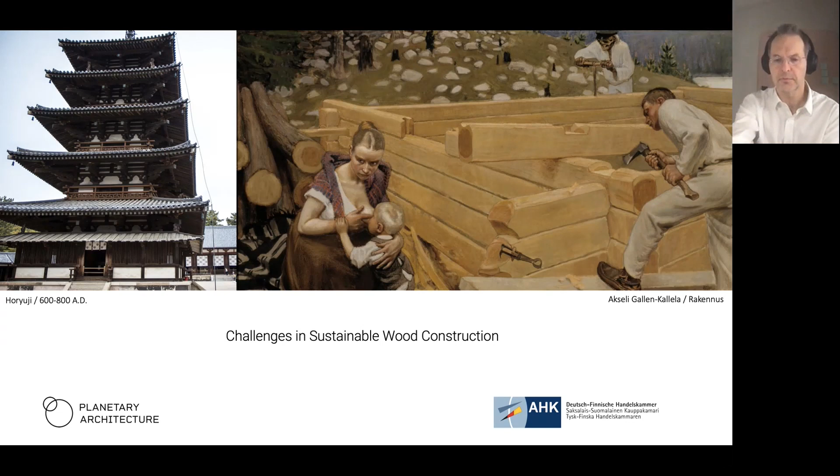And in a similar way, in the Finnish culture, we have had these log house structures that are like the ultimate circular economy way of construction, where a single piece of log can be taken apart and then moved into new places. And that's also a strong part of our cultural heritage.

But a brief introduction. I'm an architect. I used to run an office called Pekka Pakkanen for 12 years. And in that office, I was the chief designer of Allas Sea Pool in Helsinki. I was the local partner and the chief designer of Serlachius Museum in Mänttä, and the local partner of the winning entry for the Guggenheim Helsinki competition.

That was the biggest architectural competition at that time. It had more than 1,000 entries. And I'm teaching timber architecture in Aalto University as a part-time teacher.

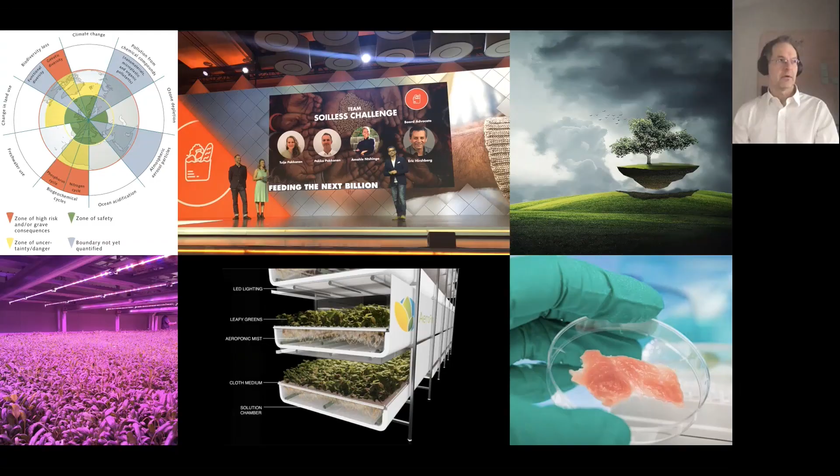The reason I started my present office called Planetary Architecture was that I hit a wall of meaninglessness maybe some 5 years ago. Our office was doing sort of high-class architecture, but it didn't feel like the things we were doing were answering the biggest questions that our generation should be tackling.

And I thought there was a real issue. We can affect quite a lot. The effect of architects and the construction field is huge, and I think we should use that to the benefit of both the planet and ourselves and the future of humankind. And in this path of thought, I just had to leave the previous office because the route was fixed, and I had to find something new.

As a starting point for this new path, we took part in an innovation competition in Silicon Valley. The organizer is called XPRIZE Foundation, and they had this huge science competition called Feeding the Next Billion. How do we develop the food systems to provide food for the next billion people that will be here in 12 years? Our task was not to really solve the issue, but define the question that the science community should answer.

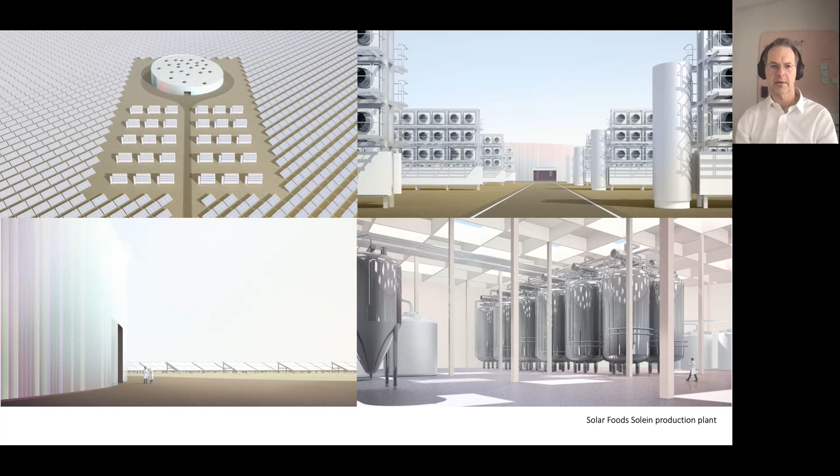We took part in this competition for like 8 months, and we gathered a big team of scientists both from Finland and from California. And to our surprise, we managed to win this. On this path, we learned quite a lot about future food production techniques. And the idea was how could we mix this knowledge with architecture, the knowledge that I had previously. From that starting point, I started the office called Planetary Architecture.

The point of why we call it planetary is that in every project we see the planet as one of the clients. Of course, the planet doesn't have a voice, so we had to imagine that. One of the first projects was for Solar Foods. That's a Finnish startup that is gathering CO2 from air, cooking it with bacteria, and producing protein powder that can be eaten. And we built a demo factory concept for them.

We tried to build this out of wood. And this was maybe the first learning from the challenges of wood, that in an industrial environment, it's actually quite impossible to have timber structures as the fire hazards are quite heavy. So we did a lot of study for how this could be built of wood, but in the end we figured out that it was impossible.

In the next case, the Neste oil company organized an open competition for ideas for the future gas stations. Once oil is not being used to run cars, what will they do with their network of gas stations? Our claim was that it should be a network of service stations, with several different services that would be prefabricated timber units placed on the plot.

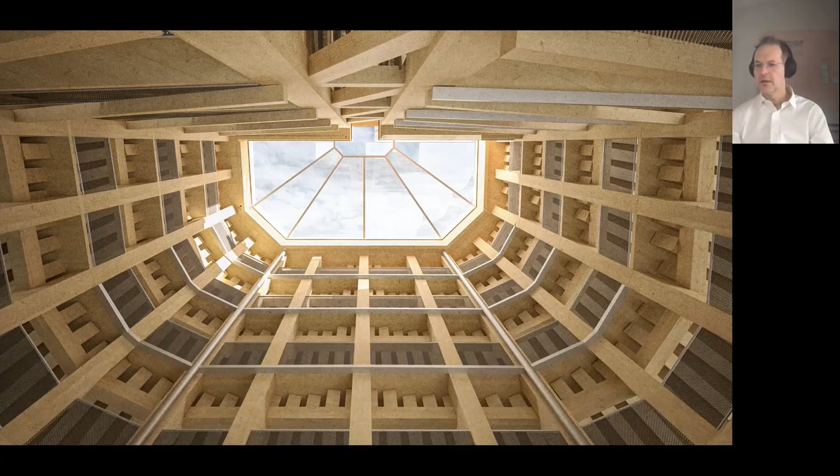Another issue or challenge with the use of wood is once you use it really heavily, like in the case of a parking garage, how would that be built out of wood? If you see a parking garage as an archetypal piece of construction, it is the most simple structure, where you cannot really take anything out, and it's also the one that has to be built the cheapest.

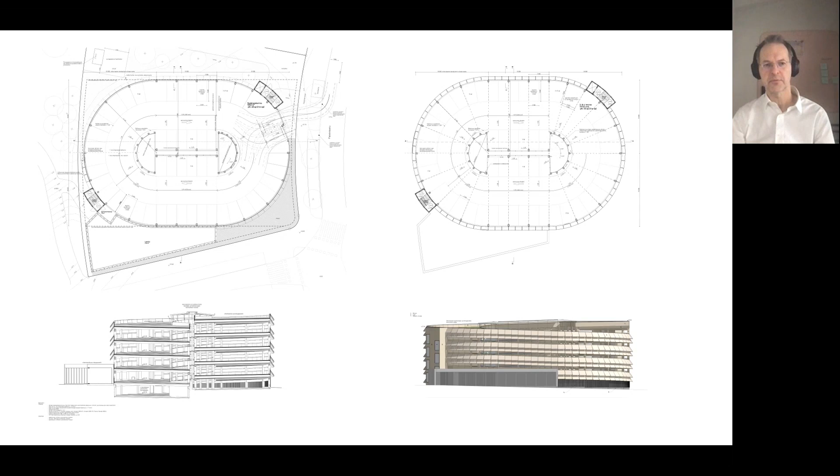So we made this parking house concept for the cities of Helsinki and Vantaa, keeping in mind that it should be as cheap as a concrete structure, and it should be something that can be taken apart, that you can add floors, that you can have it with prefabricated modular units with a limited amount of different modules. And in the end, we managed to build this system so that it takes all the weather load.

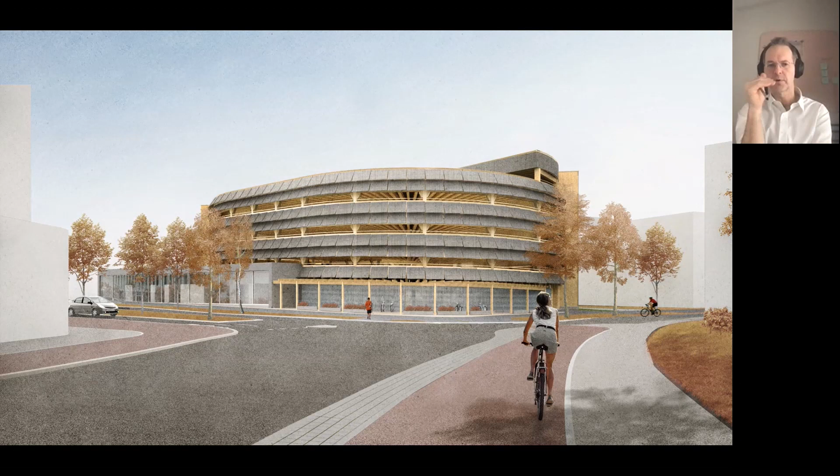The facades are built of Akoya that has a lifespan of 50 years, and on the inside, all the structures are completely solid wood, except this thin layer of moisture barrier on the floors that is not wood. And of these two samples for Helsinki and Vantaa, it looks like the Helsinki model will be built out of concrete, because they're used to doing that.

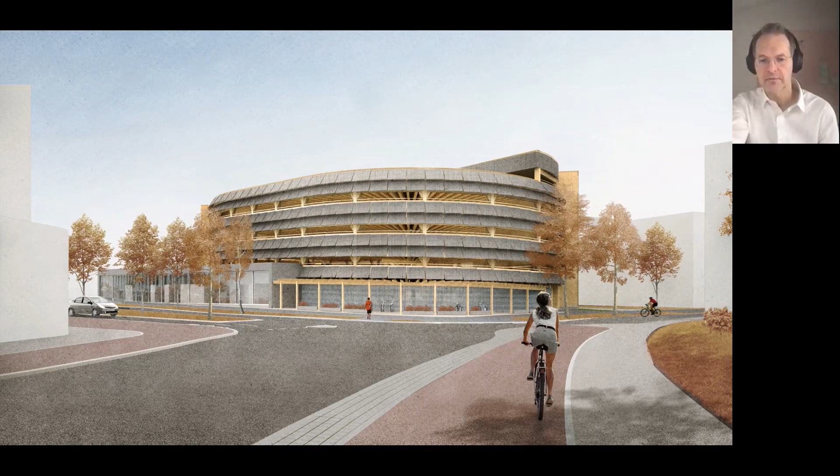This is one of the challenges of the use of wood, that as you try to bring something new to the market, there's a big challenge of changing the system, because construction is about risk management, and the risks are easily managed in the way that people do what they have been used to doing. But in Vantaa, it might be that they build this first pilot project for the timber parking house.

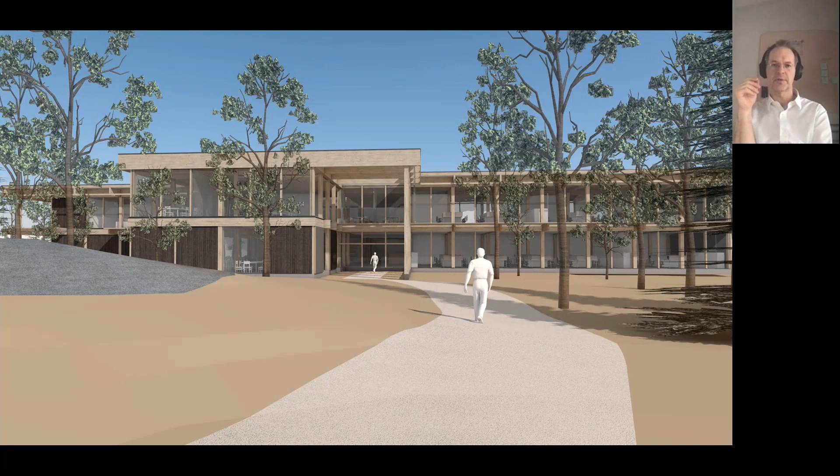And in this path of thought of the long lifespan, if you imagine this first image of the Japanese temple where pieces can be replaced, this is something that's really typical for timber, that it has mechanical joints. So if you build an office building, you can build it out of separate units that first of all have this 50-year lifespan, but once these elements are at the end of their lifespan, they can be replaced. And in this mechanical way of joining pieces, you can also expand the building.

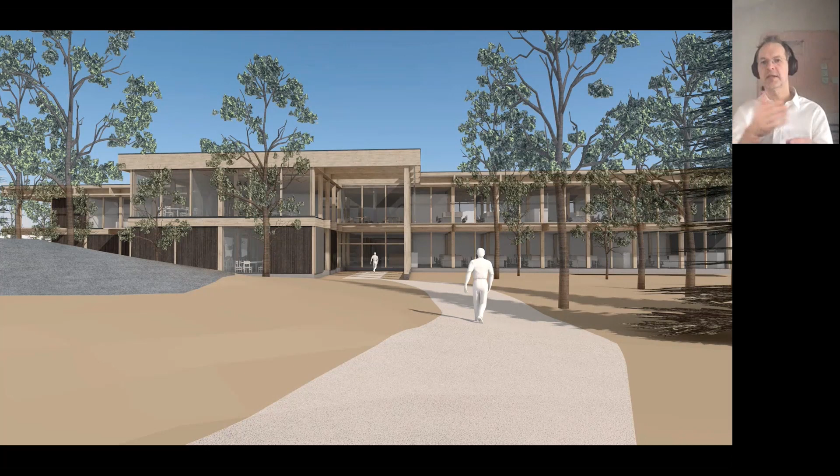So this is the headquarters of Versowood that we're designing in Vierumäki in southern Finland. It's a building that is designed to be 2,400 square meters once it's built, but then it can be extended in 3 directions using these similar modular pieces. And this is the inside of the building.

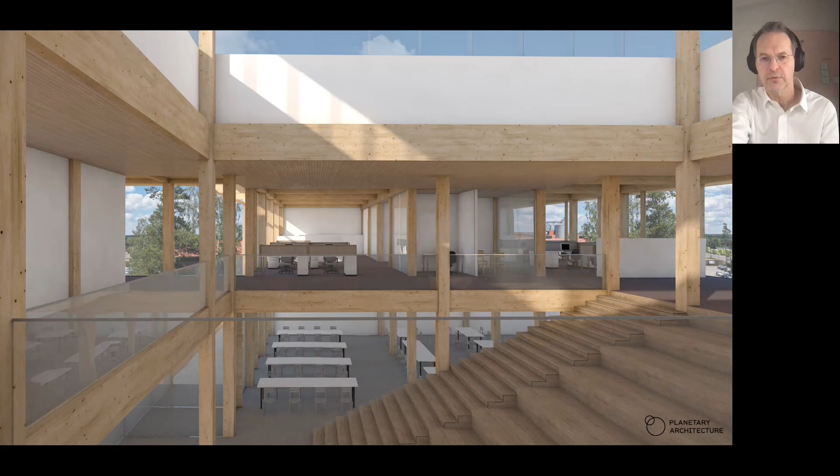It's in quite an early design stage, so now we just have the concept of building this forest of timber columns that continues the forest of the outside, and then around this there's a little dense park-like forest where this sits, and this is looking outside all the time to the forest and to the roots of the timber industry.

And speaking of lifespan, one way to extend the lifespan is, of course, to reuse the pieces. But another way, in addition to that, is that these pieces can be recycled in the first place. This is an experimental future street project we did for the city of Espoo last summer, and there were lots of thoughts of how the street could be used.

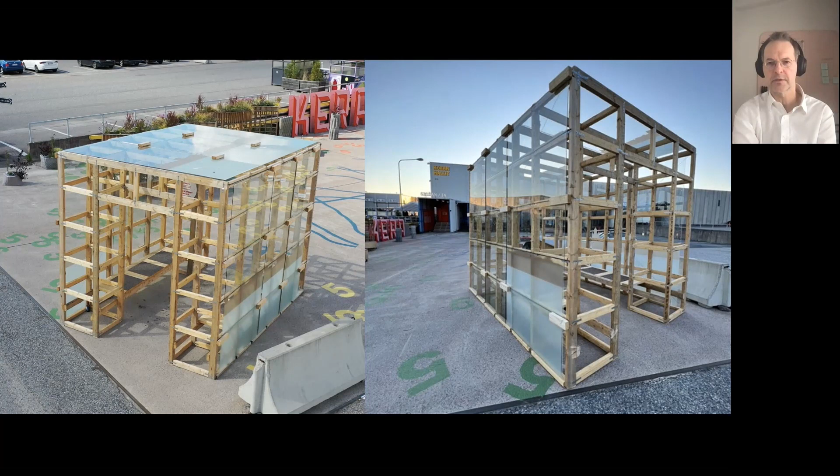But as we speak more of wood, this is this little street pavilion that we built for this exhibition or this demo street, and all these construction elements are recycled already. The vertical parts are from a bridge construction site, the horizontal ones are from the packaging industry, and the glazing is from office buildings.

These are inside office glass walls that were taken from one construction site, and all of these units have been already put into pieces and recycled. So there's sort of nothing left of this whole construction. So these pieces continue their life in different uses.

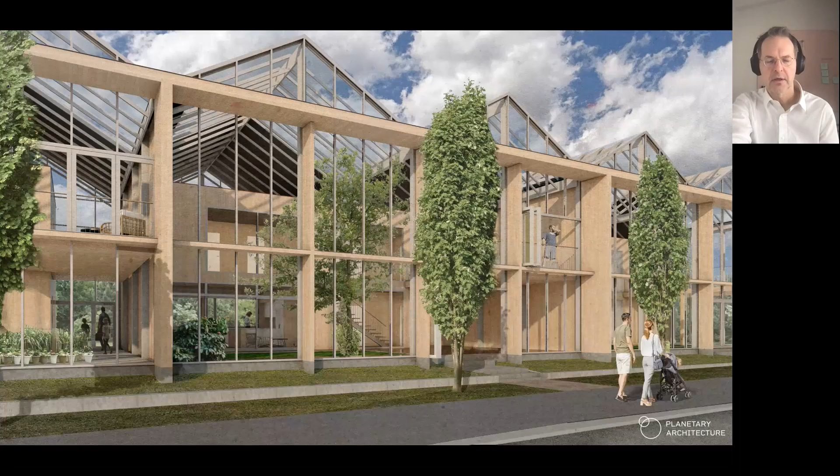Another quite central theme: I've been mentioning the fire, the heavy usage, the costs, and the lifespan of wood. But then there's this issue of moisture, which is very typical in wood construction. You have to be aware that wood should not be used in too dry an environment, but not in too moist an environment either.

So we have made a couple of studies of building houses inside greenhouses. This is a row house for the housing fair in Loviisa, just an hour and a half east from Helsinki. There are 3 apartments that are quite simple wooden CLT boxes, but they are placed inside a standard greenhouse.

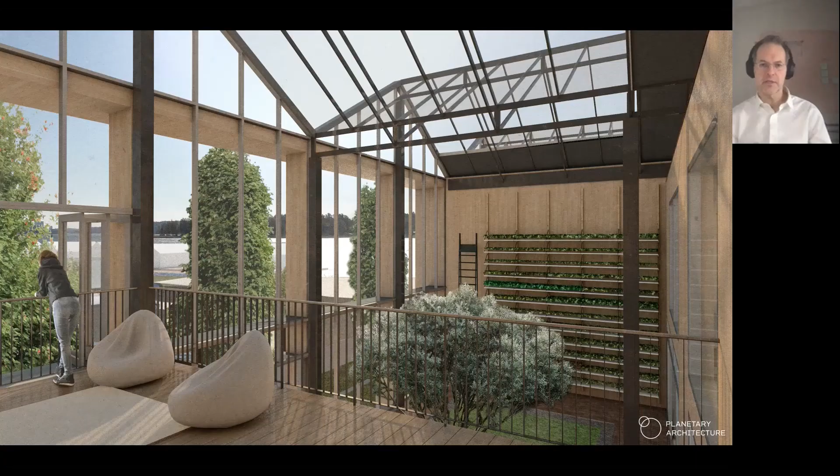The idea is that we have this unheated greenhouse where you can grow your own food for 3/4 of the year, but you can also use this space as an extension of your living room. In this project, we learned there's a bit of an issue with the moisture balance. In a real professional greenhouse, the air moisture should be around 80%, and with wood, 70 or 80 is more on the edge of the tolerance. So it should never be more, because then you might start having issues.

In a quite similar path of thinking, we have designed this concept for Y Foundation called the biodiversity building. It's a housing block that touches the ground as lightly as possible, and all of it is prefabricated. We're working on a plot to have the first of these built in Helsinki in a couple of years.

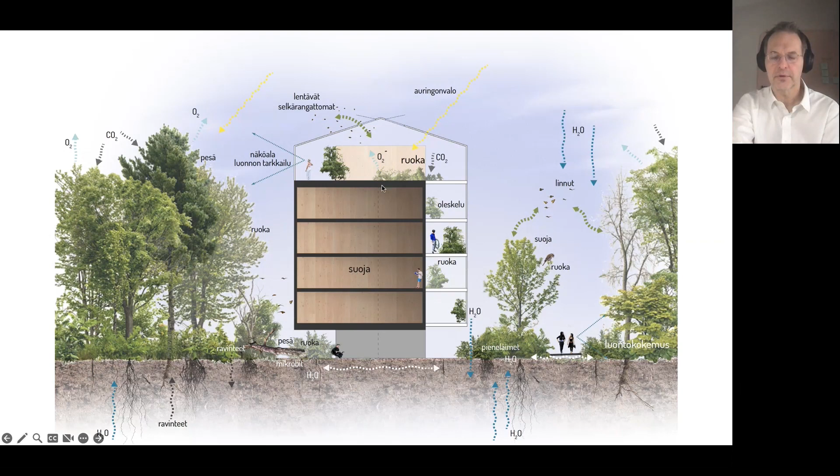The core of the concept is that we don't destroy the whole plot. We prefabricate it and install the structures really lightly on light foundations. Inside the building there's this warm timber heart with the apartments, and outside it there's a raincoat and a buffer zone, with a greenhouse on the top and wide balconies on one side. So if you have real biodiversity and natural values on the plot, those don't have to be destroyed.

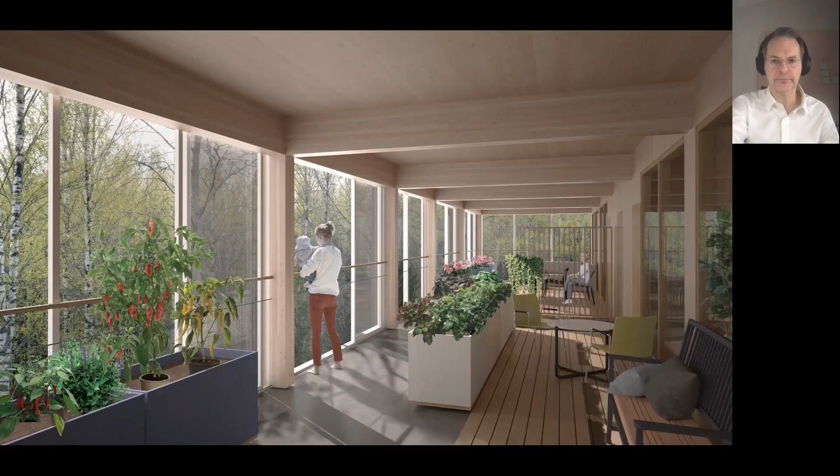The living corridors can be used as an extension for the apartments, a bit like the row house situation. On the top floor we have the best views and the best light. This is the living area, replacing the conventional courtyard of the building. So there's space for growing food, for playing, for getting together.

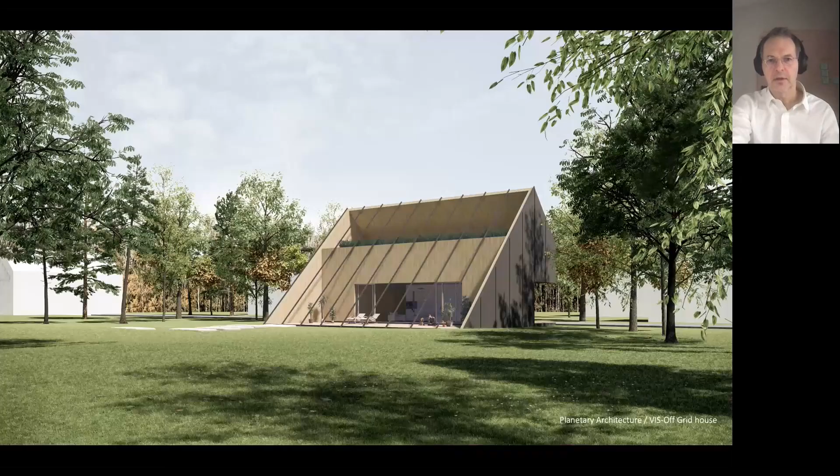Putting all of this together, if you need to deal with growing food, vegetables, or whatever greenery, and build that out of wood, you should be using some other products than conventional CLT. Pasi and Panu will be continuing from this topic, but this is something we did together with them.

We built this concept for a single family house built of these elements. Outside there's a covered roof terrace for growing your vegetables or having a winter garden, and another terrace for extending the living room. Inside there's this timber world of an open apartment that is quite light and super simple.

With this modular house, we have been playing around with the concept, thinking about taking it into production and what the market would be. One thing to add is that at the core, in the basement, there's a 50 square meter greenhouse built with these same elements, and 50 square meters of vertical farming would provide not only the food but also the oxygen for such an apartment.